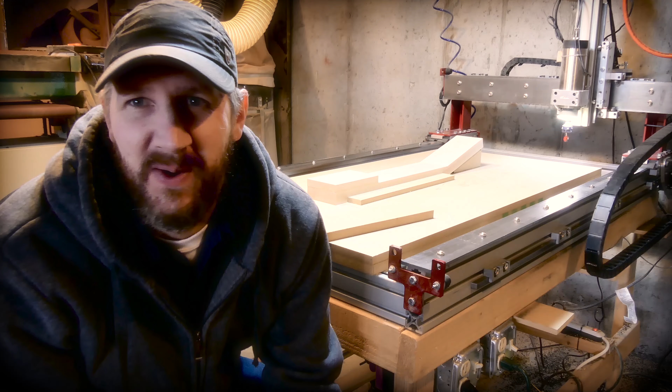Okay guys, I'm gonna try to explain this again. I know we did this in the last neck video, but people really seem interested in this subject, so I'm just gonna walk you through my setups. First, let me walk you through the CAM a little bit, and I'll show you what we're doing as far as the CAM processes, and then I'll show you how we set them up here on the machine.

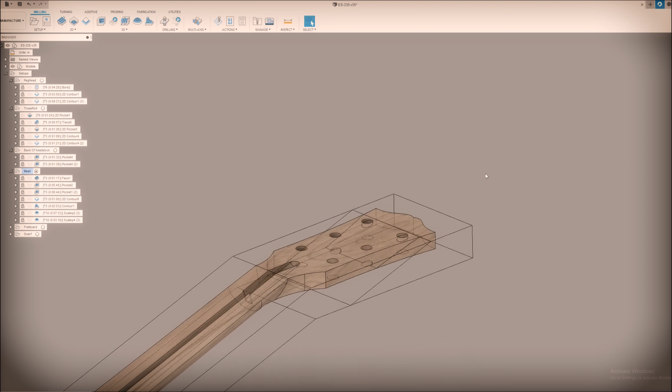Okay guys, I've had a lot of requests to show a little bit more of the CAM processing that I've got going on here in Fusion 360. So I'm gonna run through these really quick for this ES-335 fat neck, and try to provide you a bunch of information really fast. So the first setup, we're gonna set up in this orientation on the front edge of the spoil board with this scarfed edge just kind of hanging over.

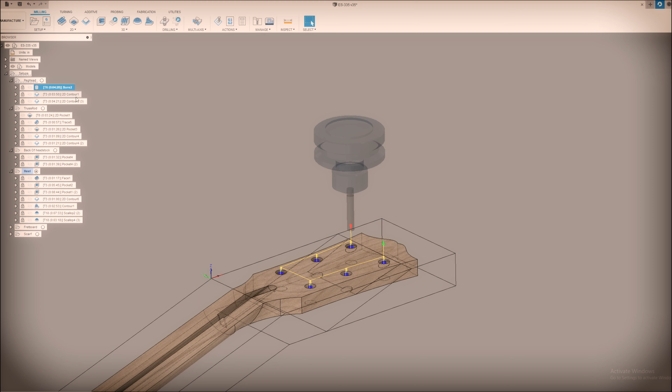We're gonna do a simple bore for the tuner holes. That's with a 1/4 inch end mill. And then we're gonna go to this contour. This is a 1/10 of an inch step down, 1/2 inch end mill with a 60 thousandths stock to leave. And then I'm doing a cleanup. These are two 30 thousandths step over cleanups that are 1/4 inch step downs. And that gives me my contour.

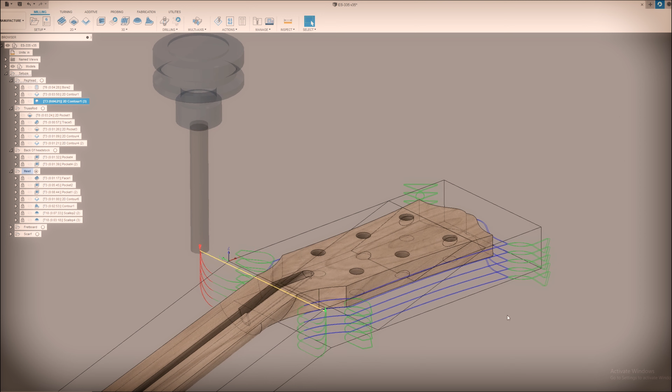These little woollygigs out here, that's just on my lead out, lead in. I've modified those so that I get that. It's kind of the first time I've really done that, and I really liked it, so we'll probably see more of this, but this worked really well.

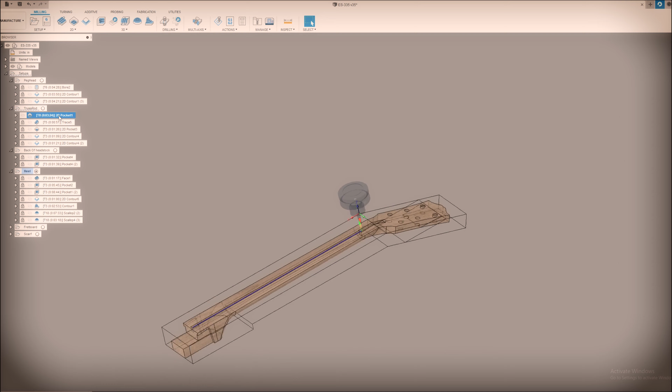So next setup, we're gonna turn the stock like this and set it up in this orientation. I cut the truss rod slot. This is just a truss rod slot with a 0.225 inch end mill. Then we're going to do a 3/8 round over and this trace operation to cut this recess for the adjustment screw on the truss rod.

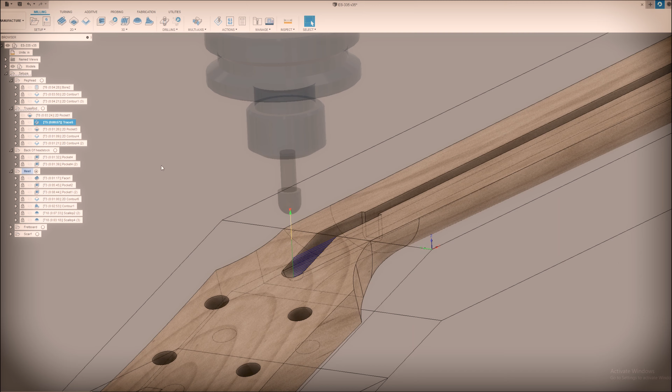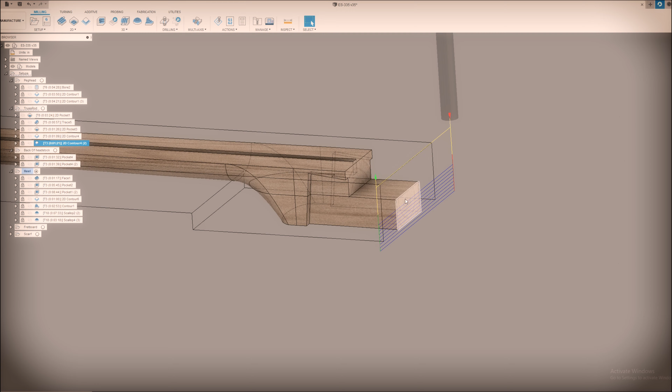I have some extra material back here that I'm going to take care of at this point, and I'm just going to rough this out while leaving stock to leave off of the face here. Then we're going to run a contour to clean up that face, and finally we're going to contour this back edge. And that's important because our next operation is going to indicate off of this face and that one face that we jointed in the beginning.

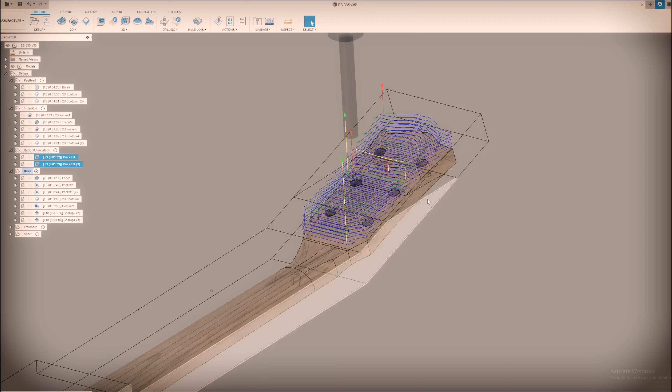And this is really our last setup. We're going to set up the stock in this orientation, and then we're going to indicate off of this face and this face. These two are pretty much the same operation. I had to do them in two pieces because of some complications, but once again, pocket operation, 1/10 of an inch step down, 60 thousandths stock to leave.

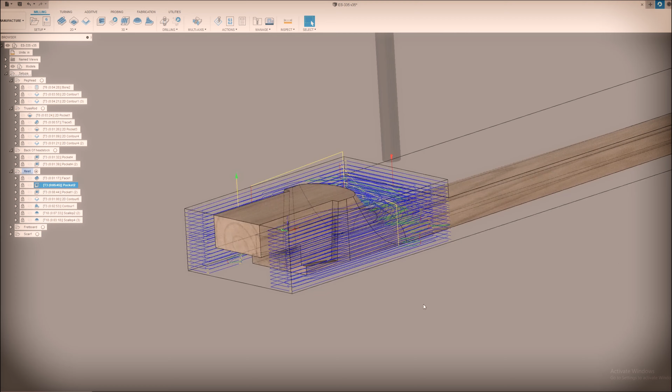Then we're going to go to the heel over here. We're just going to run a face to bring this down to the true dimension. Again, pocket operation, 1/10 of an inch step down, 1/2 inch end mill, 60 thousandths stock to leave. Same thing over here. We're going to do the same exact thing as we've done in all these other ones. 1/10 of an inch step down, 1/2 inch end mill, 60 thousandths stock to leave.

This is just a little cleanup contour, so when I run my final scallop on the back of the neck, it's with a 3/4 inch ball end mill. And that's not going to be able to reach down into this sharp edge where the fretboard engages with the neck. So I just run this little contour here just to clean that up ahead of time.

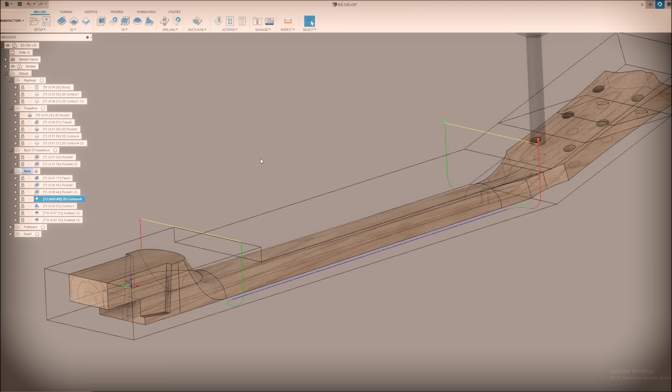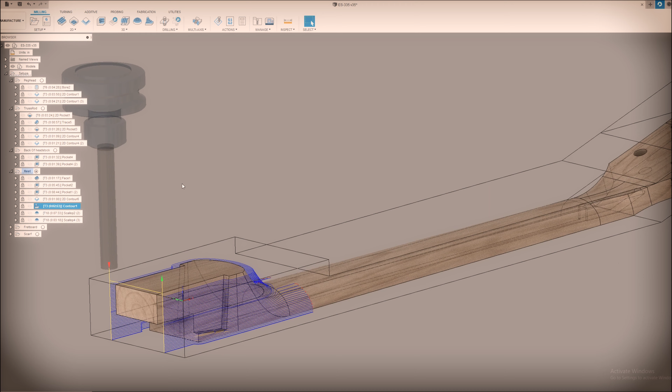Then we're going to do our finishing passes. So these are the last 3 finishing passes to clean up and to finish up the entire neck. And this is just a contour, and I'm doing this with a 1/2 inch end mill because my 3/4 inch ball mill will not get all the way to the bottom of this stock. So there are better tools for this, but I'm using this, and I think I'm leaving 20 thousandths stock on here, so I can clean that up by hand and not have any of these gouges from the edge of the end mill.

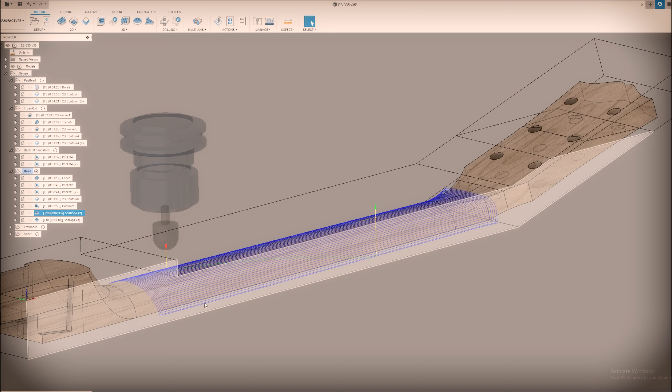Scallop, 3/4 inch ball mill with, I think this is 60 thousandths step over. We'll do that. It doesn't reach into that recess there, but I've already previously cut that contour. And then finally we'll scallop the back of the headstock to finish that off. And that's it. So that's the part. Let's get out there and let's start cutting it.

Okay guys, that was the CAM. I'm out here in the shop. I apologize for extra noise. I'm trying to make it sound as best as possible, but not ideal conditions. But people seem to want to know this information, so I'm going to try to get it to you.

So I've got a couple of things set up here on my spoil board to make this cut go as accurately as possible. So I have a small little piece of MDF here that I've set up, and I've milled an edge along this edge here. And then I have a second piece of MDF that I've milled on the other side. And then I have my scarf, and I've run that scarf toolpath that we cut the neck stock with on that as well. So that'll support the headstock when we're cutting the back of the neck.

So in the first operation, I've got my neck stock set up right here, and I've replicated the exact dimensions of this in the Fusion 360 stock for the setups on this. So everything should be very accurate. And then I've taken it to the jointer, and I've jointed off this edge, so I have a perfectly flat edge on this side. So we're gonna do all of our indicating and all of our placement on the CNC bed from this edge and essentially from the break angle where the scarf joint happens. So our first setup is gonna flush this flat edge up against the milled edge on the CNC machine here, and we'll indicate from this edge and from this edge right here.